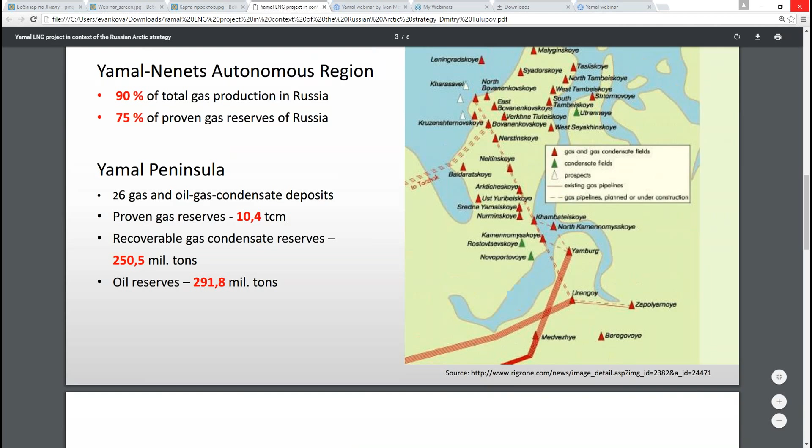So now, please turn to the third slide. If we proceed to Yamal Peninsula's importance in the Russian Arctic oil and gas strategy, we should take into account that the Yamal-Nenets autonomous region in general is home to 90% of total gas production in Russia.

Specifically, Yamal Peninsula is home to 26 already discovered gas, oil and gas condensate deposits. Proven gas reserves in this region amount to almost 10 trillion cubic meters of gas. Recoverable gas condensate reserves are estimated at the level of 250 million tons.

And of course, the Yamal LNG project serves as a sort of pioneering project for Yamal Peninsula. If we proceed to the fourth slide, we will see general details of the Yamal LNG project, and I suppose you already know this information, so I will just tell it briefly.

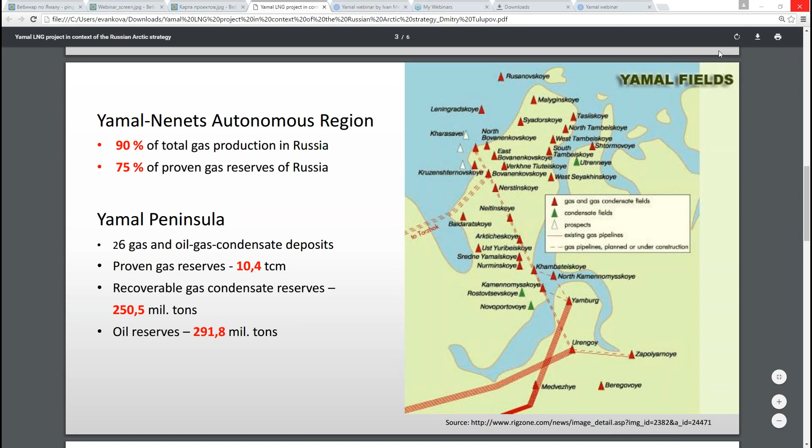So Yamal LNG should be a sort of pioneering project, the start of a big story of oil and gas exploration and development in the whole Arctic. Thank you for your attention, that's all I wanted to say. And I pass the floor to Ekaterina.

Thank you very much, Dmitry, that was a great presentation. So a question for you: do you consider Yamal LNG to be a project with critical strategic importance for the place of Russia in the overall energy balance?

Yes, I think the economic importance of this project is overwhelming, because this is the first major project in the Russian Arctic with such strong ambitions in foreign markets. Many countries show interest in this project, not only in Asia like Japan or China, but France is also an active stakeholder in this project.

So I think this Yamal LNG initiative is a first major step in the implementation of the Russian Arctic strategy.

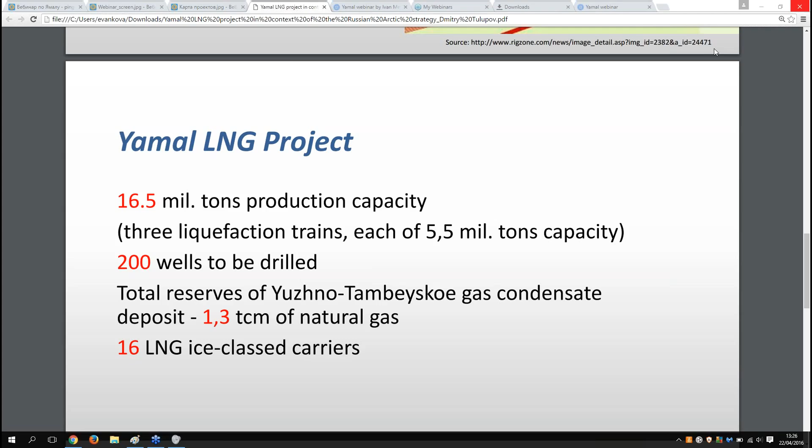So the leader of our voting process is Novatek, which has 43% of the overall votes. The second place is occupied by Gazprom, and as you see, the percentage difference is not that significant. The third place goes to Gazprom Neft. 10% of the votes went to Lukoil and only 7% to Rosneft. I think this is also quite interesting.

Dmitry, what do you think about the distribution of answers? Do you agree with this scheme? Because it pretty much supports what you mentioned about the Yamal LNG project.

Well, usually all polls have some reasonable degree of bias, but I agree with the idea that Novatek has pioneering experience, so it's very consistent to give first place in this poll to Novatek.

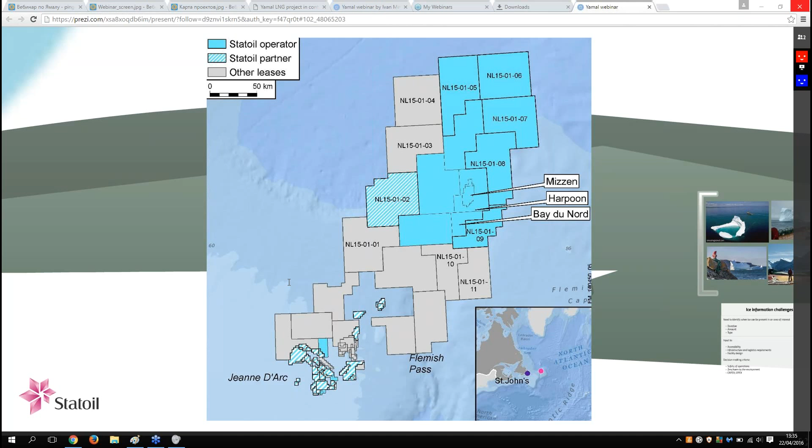This deep water region is very challenging due to the threats from massive icebergs and potential sea ice encroachments. This slide here shows some of the threats we are facing in this region. Basically, we operate an entire fleet of iceberg management vessels that routinely tow away hazardous icebergs from the vicinity of our installations in this region.

Nevertheless, our platforms obviously have sufficient hull strength to withstand accidental ice impacts, which results in a CAPEX footprint, of course. Additionally, we are in need of solid tools and technologies for estimating operational expenditures for ice management support operations, as well as for estimating downtime of our production in case of disconnection events.

And this leads us to several ice information requirements that are shown here. We need to be able to robustly identify when ice can be present in an area of interest, its duration, amount, and type. This information gives input to the analysis of infrastructure accessibility, logistical requirements, and facility design, which are fundamentally driving our decision-making process, which is based on our need to ensure safety of operations, zero harm to the environment, and optimized CAPEX and OPEX.

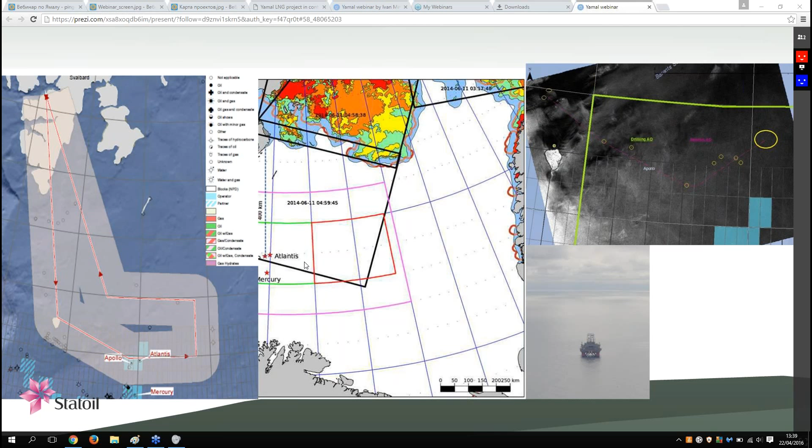On the left-hand side, you can see the path of an aircraft surveilling the region north of Norway, south of Svalbard, when we were performing exploration operations in the vicinity of Apollo, Atlantis, and Mercury wells. In the middle is an ice chart which tells us where we can expect sea ice encroachment, and to the right are actual satellite images of our drilling configuration here on site, including the actual drilling rig itself, in this case West Hercules.

So if you look at this problem at a higher level, we can imagine it to be the problem of the so-called Internet of Things. On the left-hand column, you see the platforms and sensors that are being used in this decision-making process.

We have the satellites, synthetic aperture radar, optical and infrared. We have aircraft and remotely piloted aircraft systems with onboard sensors such as synthetic aperture radars, conventional radars, optical and infrared, and human observations through remote camera control. On the vessels we also have radars, optical, infrared, and human observations. We deploy beacons with GPS trackers on ice floes and icebergs. We use AUVs with sniffers, sonars, and optical sensors.

This raw information flows into the sensor synergy block that integrates it and produces an information layer integrated with the MetOcean data, winds, waves, and the automatic identification system for our vessel fleet. That goes into the modeling and forecasting loop, which gives feedback to the deployment of an optimal sensor suite and eventually closes the loop to the detection platforms we are using. The final outcome of this loop is the surveillance philosophy and the display provided to the decision maker in support of his critical operational decisions.

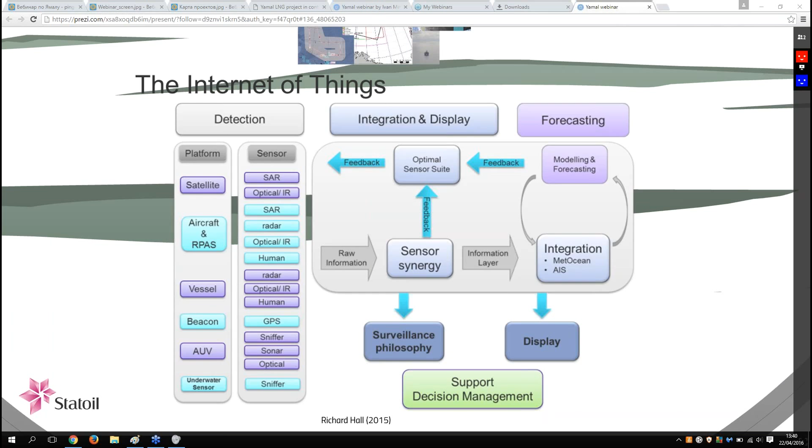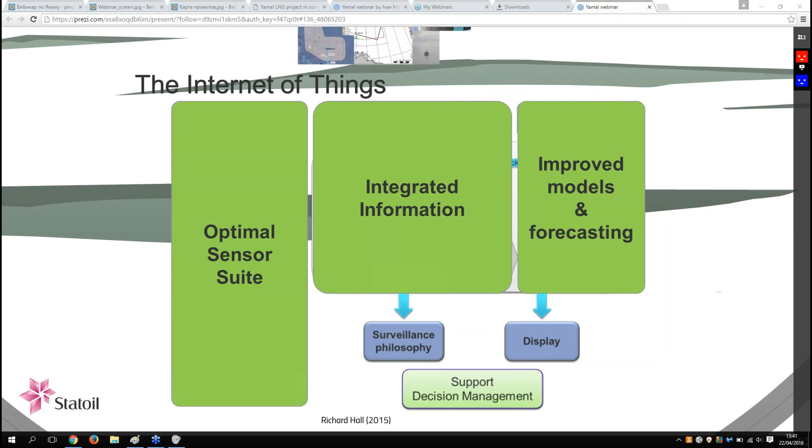So in totality, this can be summarized as a combination of synergies between optimal sensor suite, integrated information management, and improved models and forecasting. When it comes to improved models and forecasting, I would like to mention one example of a numerical tool we are using, which is called the simulation of interaction between broken ice and structures.

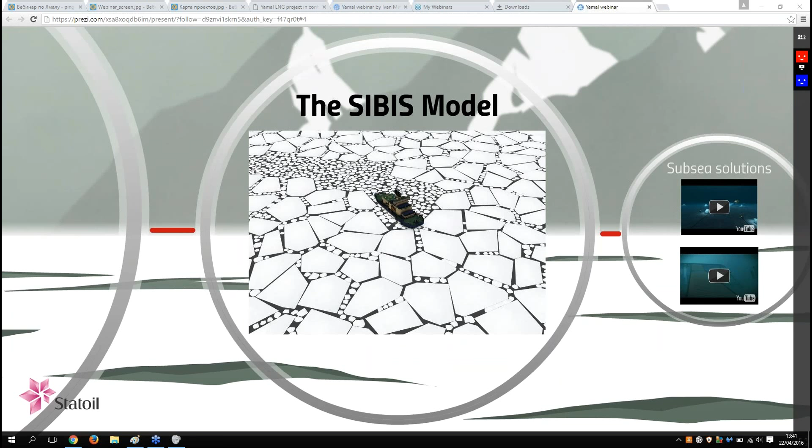This model has been developed by us in Statoil for our internal use, and it simulates ice forces and ice actions on floating structures and vessels in the Arctic. The vessel here is modeled with high fidelity using a detailed mesh representation.

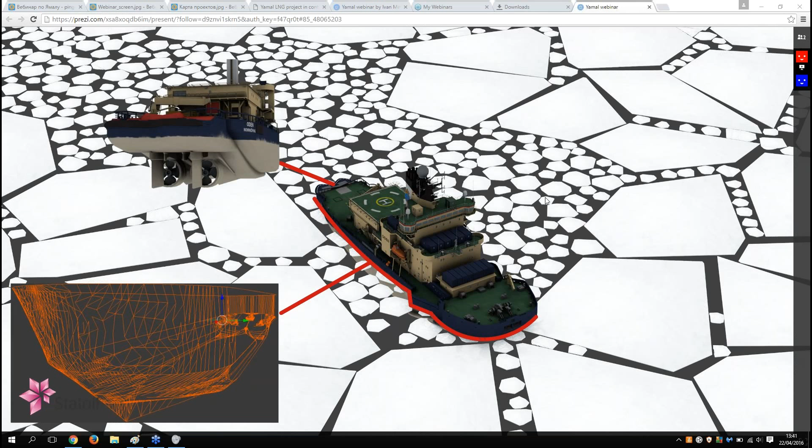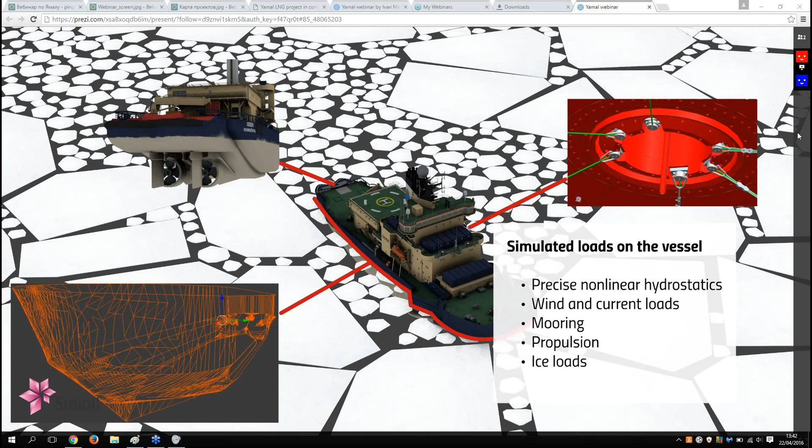When it comes to the actual ice loads, each ice piece is simulated with high fidelity using its detailed physical and mechanical properties: thickness, density, flexural and compressive strength, Young's modulus, Poisson ratio, fracture toughness, etc.

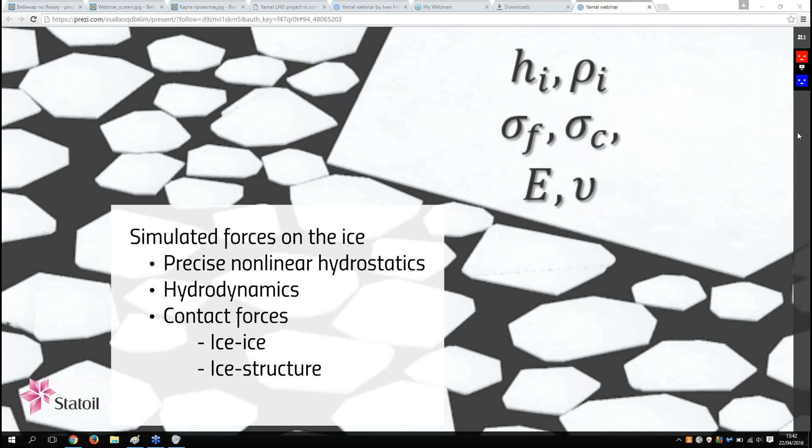These forces basically lead to a precise description of how the vessel would behave under the influence of the ice environment: pressure, friction, and failure of the ice - crushing, rafting, flexural bending, and splitting.

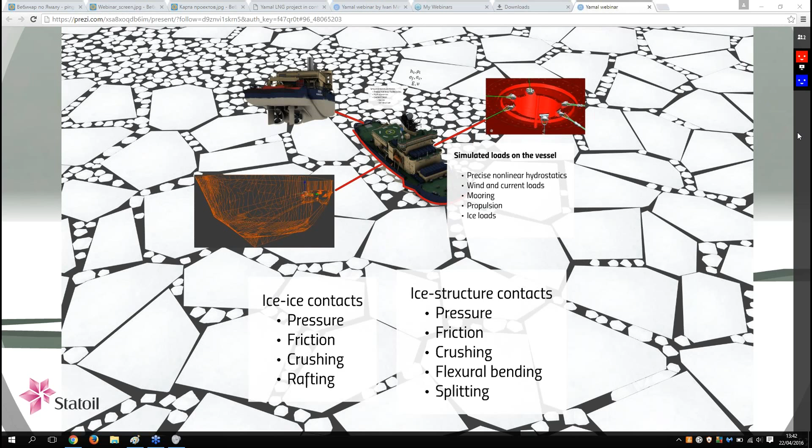And this system allows us to perform probabilistic analysis and exposure considerations depending on the type of ice that is encroaching our operational site. Using our cloud computing GPU-accelerated simulation technology, we can in real time play with many different operational scenarios and then take decisions based on the level of threat - in this case, for instance, the force in the mooring lines acting on the vessel.

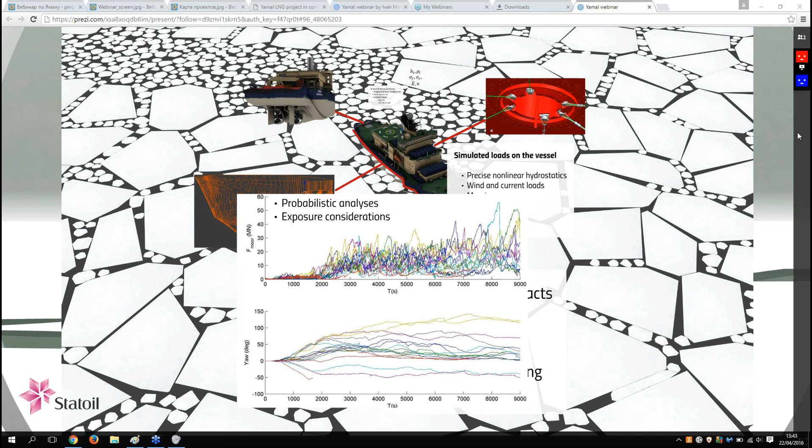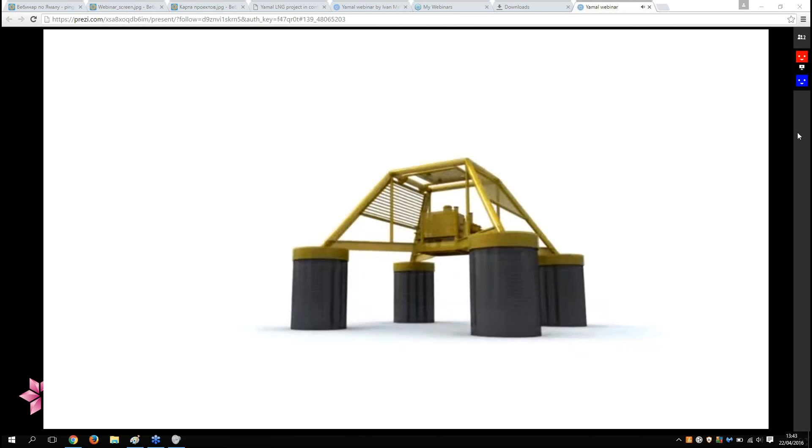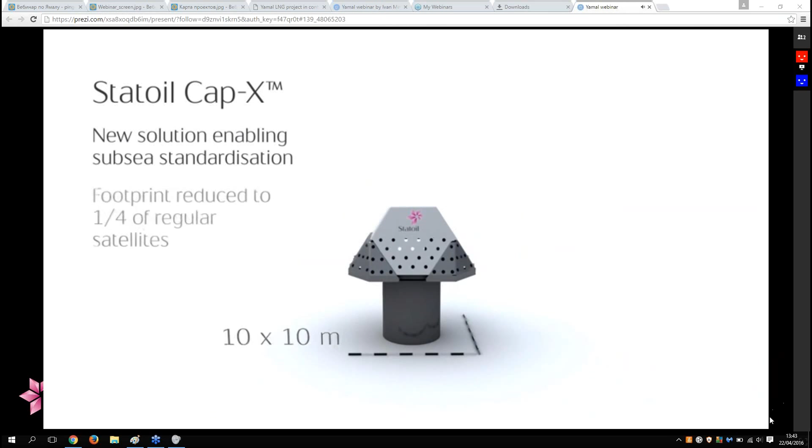This concludes the ice-related part, and I would like to wrap up with a video about our subsea development. The latest one is our new subsea innovation, which is intended to become the standard for next generation subsea solutions. The objective of this technology is to increase efficiency and reduce costs of subsea installations and developments in the Arctic.

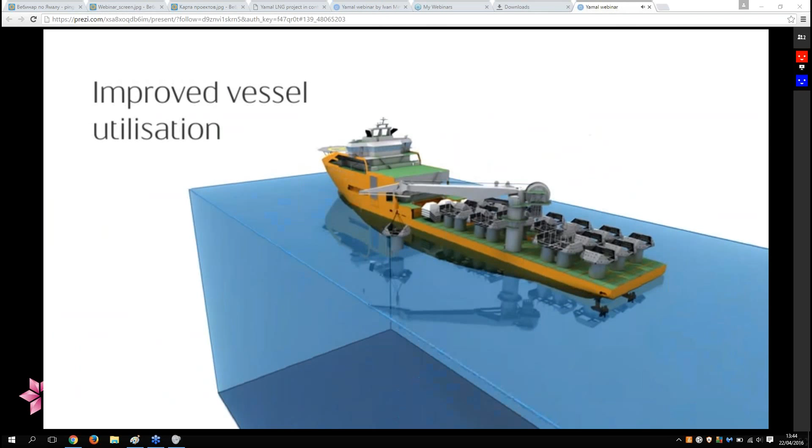It is produced in much shorter time and with potential for local production and local content. It moves more activity from the rigs to the supply vessels, and essentially it is built around the well-known suction anchor technology. In this case, suction anchors are still the foundation of the solution, supplemented by a skirt and a cap in glass fiber. And with this, we're basically one step closer to a plug-and-play solution on the seabed.

Thank you, that's all I have.